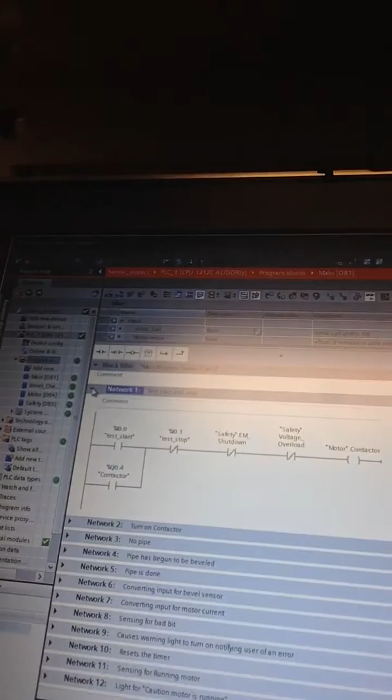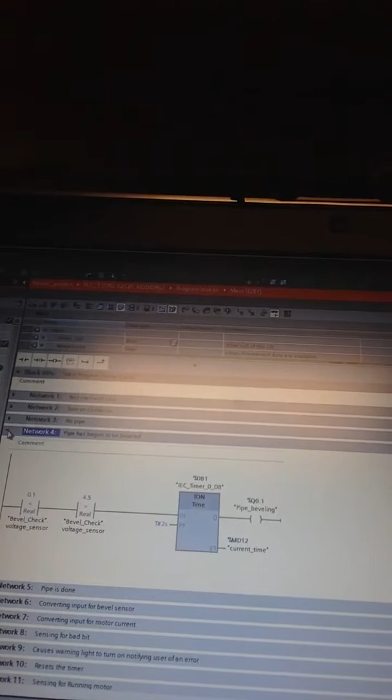You can see we've got these different networks. Everything is live right now. We have the start and stop, which will start the motor and stop it. You can see that these are not active right now. And then we also have this, which will turn on the contactor, which will run the motor. This is for if there's no pipe in the machine. This is the pipe has begun to be beveled.

This is saying that the pipe is done once the current or voltage is in the correct region, from 4.6 volts to 4.75 volts. And you can see that is working in Cameron's video.

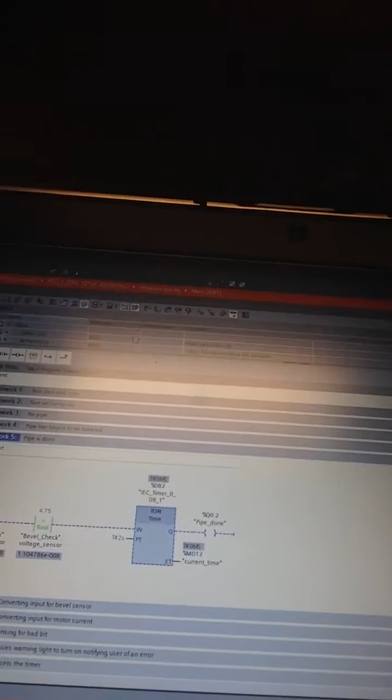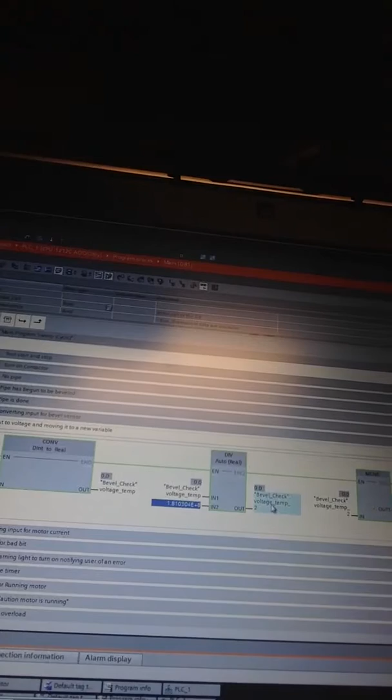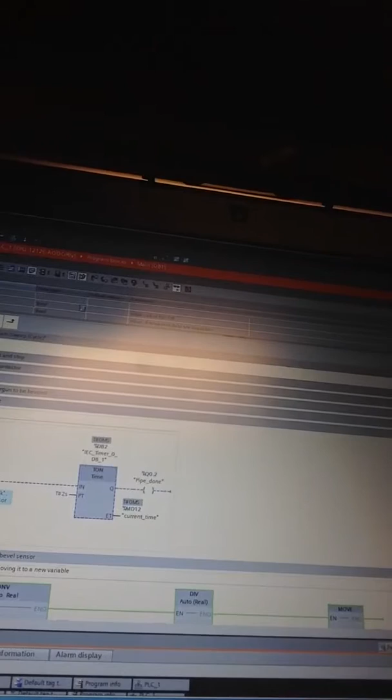This is where we take the input in as a double integer and we convert it out to a real number, and from that real number we're dividing by this large number to get it in the range that we want. It's fluctuating a bit right now, but it's about 0, and then we're moving that value to other places, which are these greater than or less than logic to make things work.

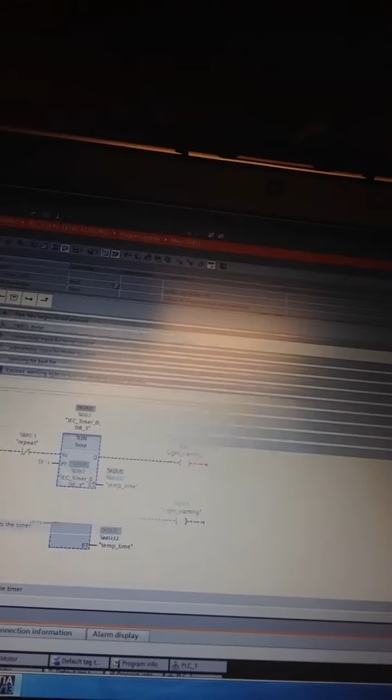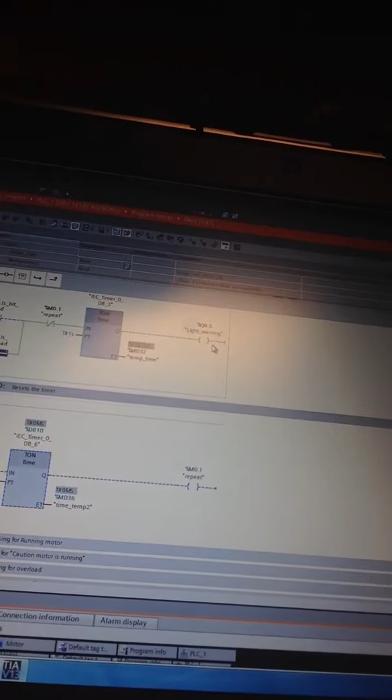We also have the same converter for the motor current, reading the current coming out of the motor, and this is sensing to see if there's a bad bit or the motor is bad. And then if the bit is bad or the motor is bad, we have these two sections. I will toggle this on. There will be a light that will toggle on and off. This is that light. It'll be repeating, and this is what turns this off and repeats it.

So let's look at the PLC. You can see that light number 5 is turning on and off every second. 1 second on, 1 second off. And I can turn that bit off, and then they'll stay off. We're looking at this live. Let's look at network 11.

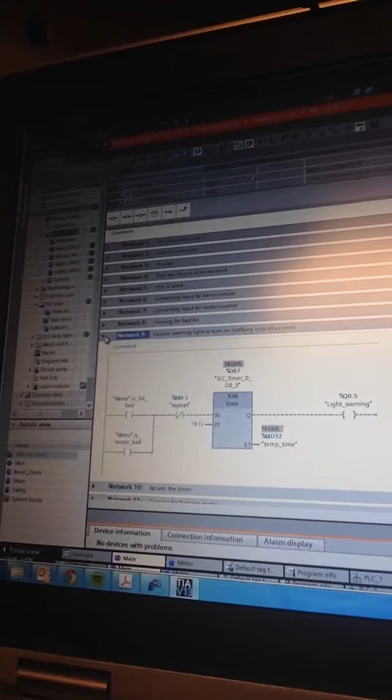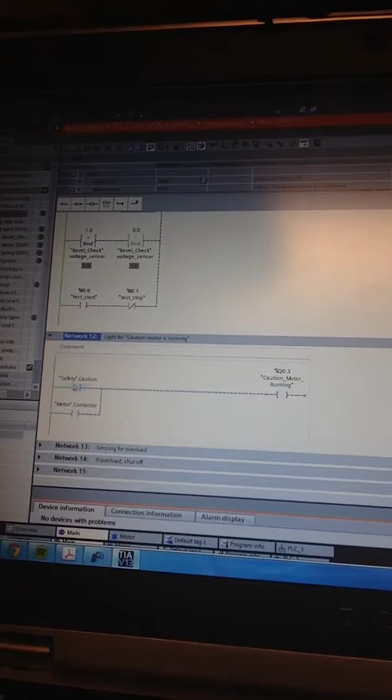So this is sensing for if the motor is running. So if any of these things are live, then the motor is running, and there's a caution light that will go on. We'll see that that's working. So for the caution, this is setting the bit that there is a caution and that it needs to be going. So if the caution is lit or the motor contactor is on, then the caution light will be running. And then sensing for overload.

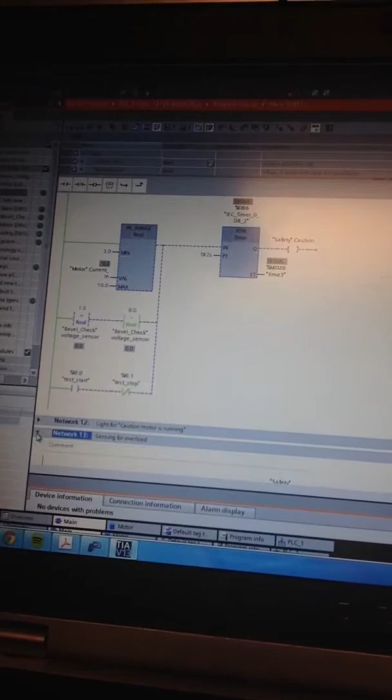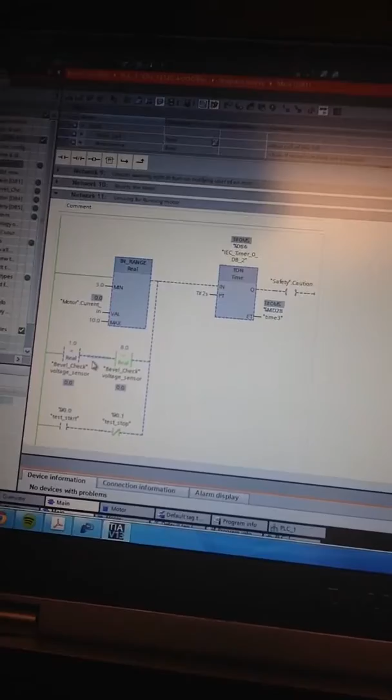If there is any overload, it will go to the next line, which will do an emergency shutoff, and then that emergency shutoff light will stay on until the stop switch resets everything. And then this is to make sure that the motor is running. Now let's turn that on.

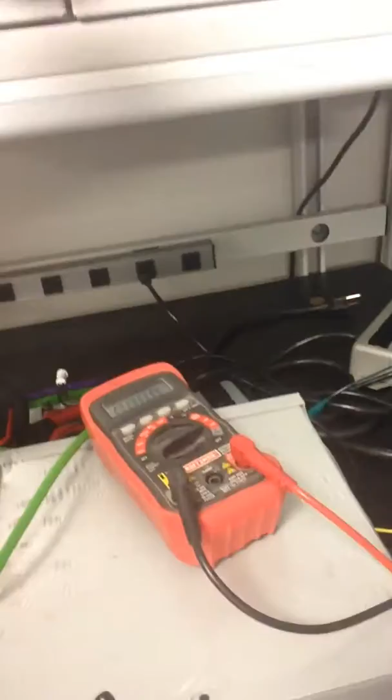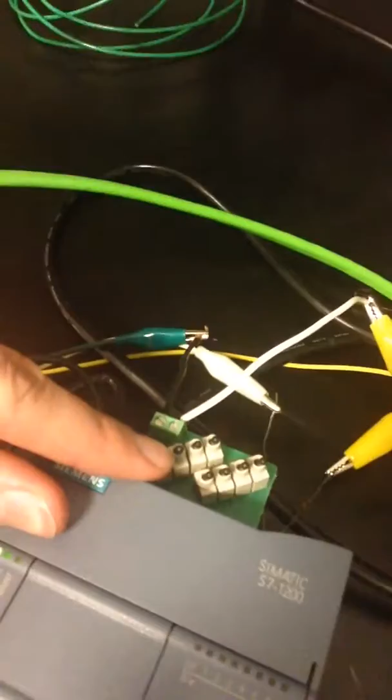You can see we have a light right here for whether the motor is on or off, and we can also read the current through this current transformer right here, and it is hooked up to that meter, and this is our contactor. So we're live right now. If I flip this switch, then the motor will run. That second switch turns it off.

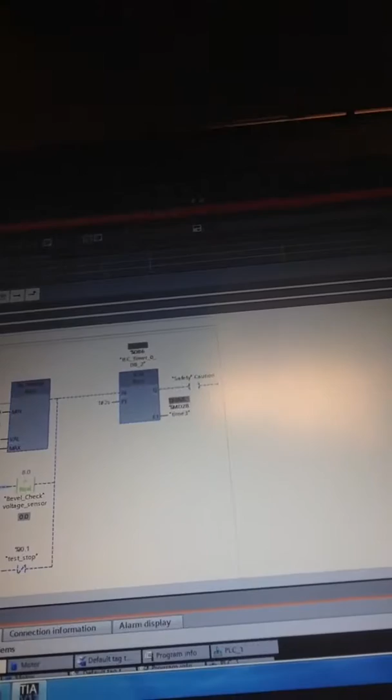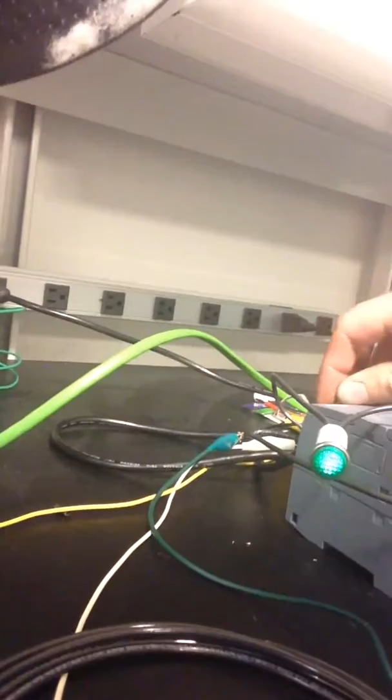Now let's look at the code. You can see the code here, and so when I turn the motor on right now, you can see that those lit up green and that those lights were going. We can also look at the light right here. And that light's working.

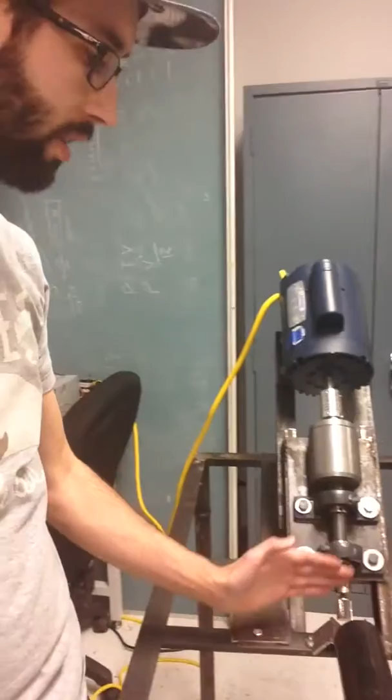So the programming for this project has been completed, and any other things will be added as necessary to improve on safety and functionality as we get more values from the voltage from the motor to find out exactly when the motor has gone bad or the bit has gone bad. Testing needs to be done on full loads to actually bevel pipes. At this point we still need the guard and the faceplate right here to make sure there's a stop plate for the pipe. And that's where we are, and thank you for listening.